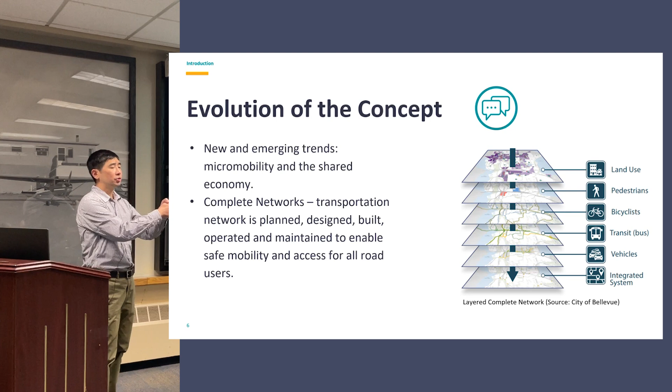So when we think about the network, we want to be thinking about not just the streetscape in its entirety, but all of the different modes that are going to be using that street or that corridor.

And we want to think about the ways that the facilities we build for those modes, and the people in those facilities, are interacting in a way that is going to be safe, comfortable, and encouraging. This is also to say that not every complete street is going to look the same.

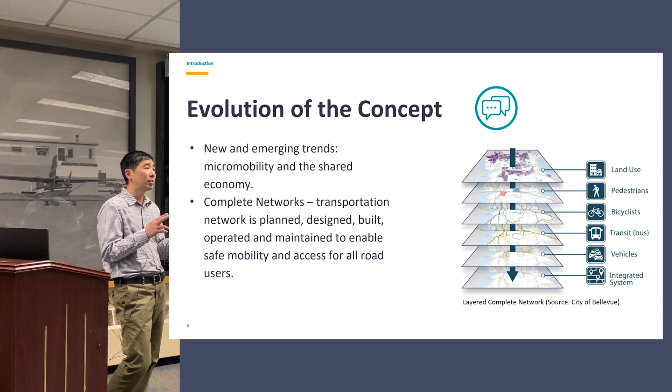When we talk about a multimodal corridor or a multimodal streetscape, it's going to look very different depending on the context, depending on what part of town it's in, and it's going to serve a different mix of modes. Not every street's going to need a bike lane - I think that's an important point we all need to be making. Not every street's going to have a bus stop, not every street's going to have a bus line. So how can we complete the street in a way that serves the broader system? That's, I think, the million dollar question.

How many of you are familiar with a modal hierarchy in concept? Great. So how many of you are beyond concept? How many of you know of a place that has established a modal hierarchy? Yeah, great.

This is a relatively new thing. I would say in the last 10 years, more and more agencies, more and more jurisdictions are starting to adopt this - putting people first. It's less about moving cars and more about moving people. And the way to do that safely, efficiently, comfortably is to prioritize the different modes and where we put our investments, where we put our dollars, where we center our programs. This modal hierarchy is really trying to emphasize that it's our more vulnerable road users - people walking, biking, rolling, taking transit - that we should be lifting up and putting our investments behind. So this is something you're starting to see in a lot of complete street policies and resolutions, in a lot more plans, and as a formalized policy.

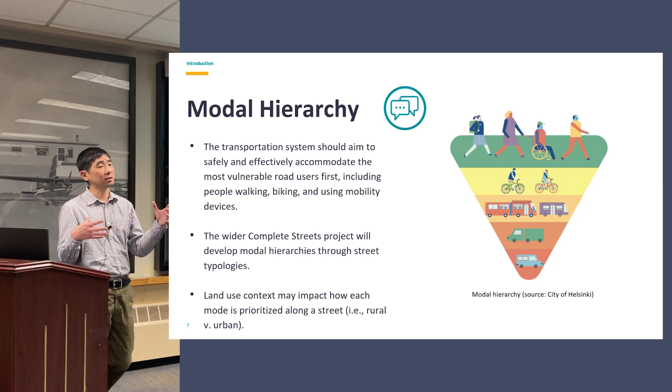Okay, so just wanted to get a little bit of feedback here. Colin's got some examples that I hope you're all familiar with. As we go through these, we want you to be thinking about not only is this a complete street, but who is it serving? Is it what we would consider all ages and abilities? Is it not only safe, but comfortable and encouraging?

So definitely keep that in mind. This is just to get us thinking about, as Derek was mentioning, some local examples of streets that have complete streets components, maybe were designed to be complete streets - kind of what some of the strengths are, maybe where some of the shortcomings are. I'm going to go through the list really quickly, so when we get to the discussion component, if anybody wants me to go back to something, I can easily do that.

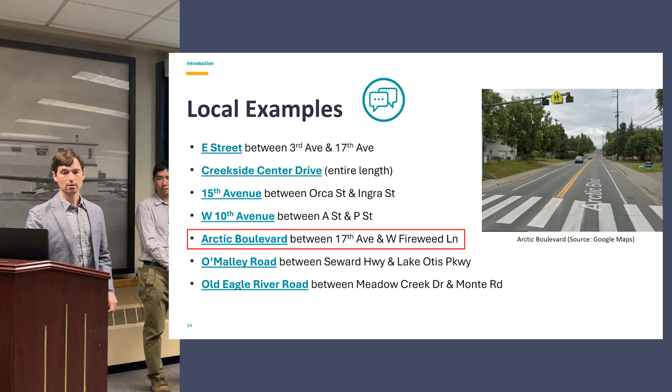So I have a bit of a short list here, but first: E Street downtown between 3rd and 17th Avenue. Creekside Center Drive, the entire length. 15th Avenue between Orca and Ingra Street. West 10th Avenue between A and P Street. Arctic Boulevard between 17th and Fireweed. O'Malley Road between Seward Highway and Lake Otis Parkway. And then Old Eagle River Road between Meadow Creek Drive and Monte Road.

Again, just to open it up - does anybody have thoughts on those streets, where they might be doing things well, where there could be some improvement, where they might be falling short, or any reactions at all to that?

And some things to think about: we have really appropriate and continuous facilities on some of these streets, but are there opportunities to cross where people might need to cross? Are they comfortable with the speed and amount of traffic? Are they adequately maintained in the winter, and is there enough provision for keeping them clear in all seasons? So some things to think about.

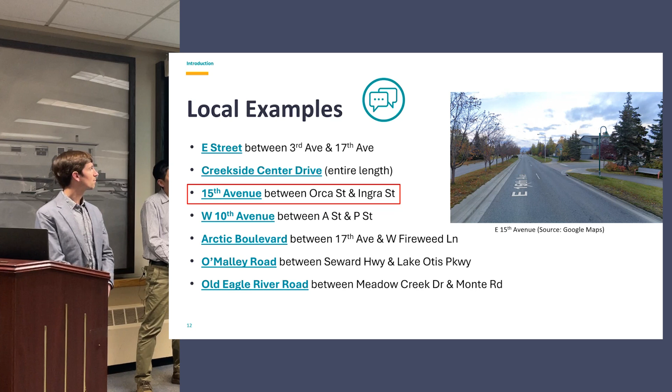But we had a few slides about having network. One of my gut reactions, stripping myself out of context, I know these streets. When I see ones like Creekside Center that have nice landscaping, as you flash through the photos, my gut reaction is, oh, that's a complete street, because it looks more like pictures you'd see in a complete streets plan. Whether or not it actually functions that way, that's my gut reaction. Seeing the trees and stuff makes me think that it is.

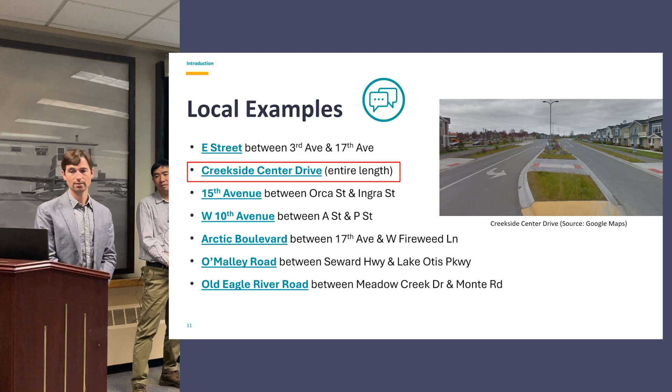Yeah, that's a really good point. Speed is a huge component. Most of these, with the exception of O'Malley, which is clearly a higher speed road, and maybe that's a good transition to talk about that a little bit - this is where we get into context as well. So is O'Malley Road a complete street for its context, or could it be improved? Thinking about 15th Avenue in the Fairview area, those crossings being so difficult is probably not so appropriate for that context. But O'Malley Road, there are a few crossings, but it's also in a much different land use context. So is that appropriate or is it not?

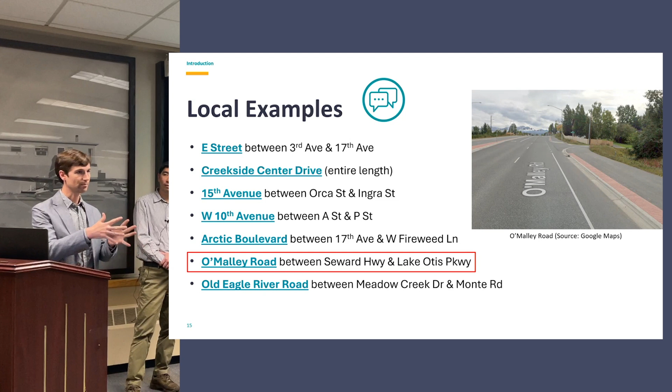And winter maintenance - there is a bike lane, or bike lane/shoulder, an attached side path with no buffer. So in the winter, as we know right now, it gets very, very difficult to traverse. In my perspective, in Anchorage, the street includes a snow storage area - if you don't have a snow storage area in Anchorage, you don't have a street. But then an attached bike path like that, given the speeds and volumes, it's not the right facility for biking on, based on the guidance that exists. So a separated multi-use path would be a much more appropriate facility versus a multi-use path that isn't separated.

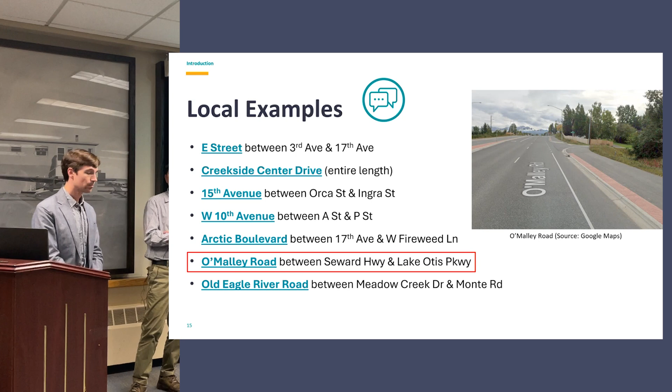Yep, and that's a really good point too - just because there's a bike lane doesn't mean it's the right spot for it. That's another contextual element. With those speeds and volumes, most people are not going to want to bike in the street at that location. So I think it's easy to look at a lot of these example photos and start to pick them apart, start to think about where is the room for improvement. I think we could argue there's room for improvement on all of them, right?

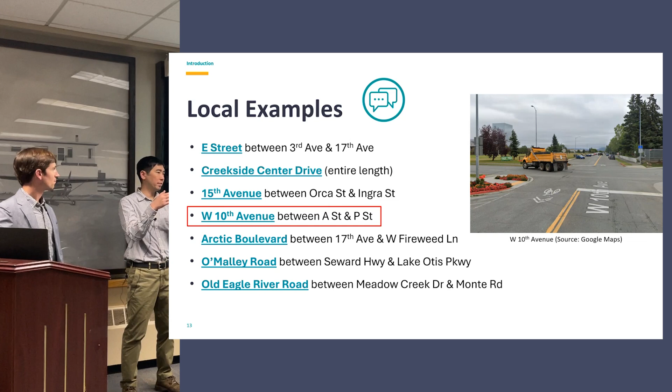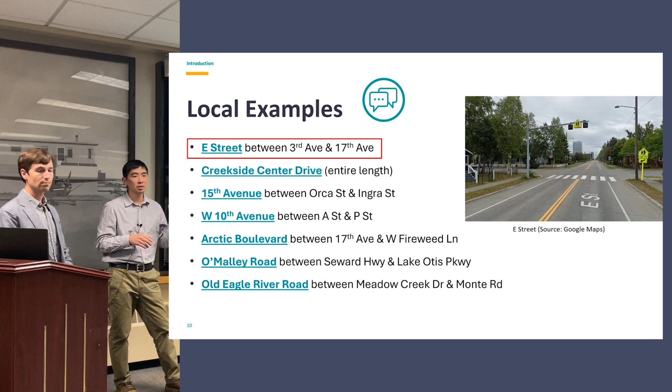But that's one of the beautiful things about this modal hierarchy - it gives us a framework for evaluating roadways based on the user type. So talking about the pedestrian experience, when snow is being stored in a buffer, if there's a buffer, and thinking about it from the perspective of different users helps us identify what are the areas for improvement with each of these streets to make them more complete. Exactly, and thinking about age ranges too - all ages and abilities - some crossings might be fine for us as adults, but for a smaller child, they might be kind of a deal breaker.

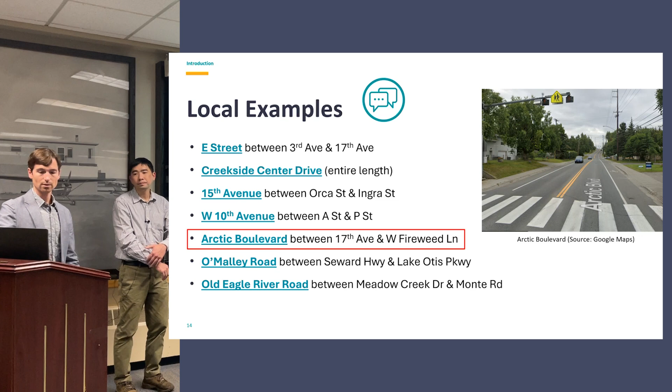Any other thoughts before we keep going? I don't know the history of it, but I'm glad you included the Creekside Center Drive example. I think that was done entirely by private development.

I think it's important to put in here because that's not department or agency folks dreaming that up. That's a representation of what was in code or in standards to require a developer to build that. And that's why it looks the way it does for that stretch, and functions the way it functions, and then it ends, and then what?

Good point. Creekside Center Drive as well. It's nice, lower volume, cars are going a little slower. And they've been putting higher density housing there. It's like they built it and then it got more dense. So that's been really cool.

And there is a way to get there, like if I wanted to walk from my neighborhood, I could get there and get to the Fred Meyer. But the wayfinding is horrible. It's like, go down this dead end street to get to the path. So talking about that connection to make it a network, it needs a little wayfinding.

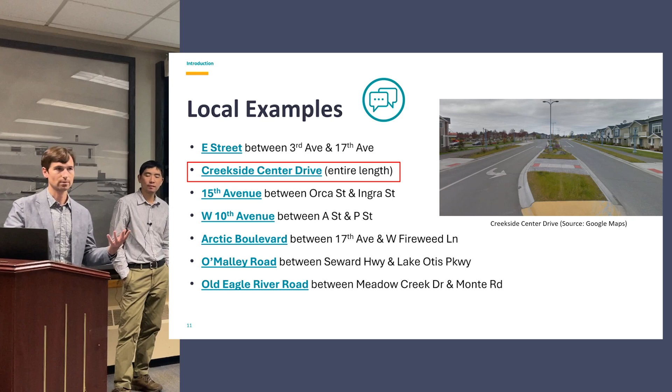And switching gears a little bit, going to a policy basis for what we're doing here. So just the quote that we like, which explains complete streets policies and what they're about broadly. I'll read it: A complete streets policy ensures that the entire right of way is routinely designed and operated to enable safe access for all users. Pedestrians, bicyclists, motorists, and transit riders of all ages and abilities must be able to safely move along and across a complete street.

So it's a good quote because it brings a variety of things into the mix. It talks about maintenance, talks about routinely—here that could mean all seasons, not just summer, not just winter. It talks about different modes and different ages and abilities. And it also brings up the fact that people need to cross the street. It's not enough just to have a street where you can move along—you have to get to destinations on either side.

Digging into it a little bit, what does a complete streets policy do? This is going to be review for a lot of you because we have a complete streets policy. AMATS has a policy and it does many of these things, if not most of them. I won't read through them all, but establishing commitment and vision is really important: applying to all projects and phases, coordination, adopting excellent design guidance. The policy does reference multiple design guides and the potential to bring those into complete streets design.

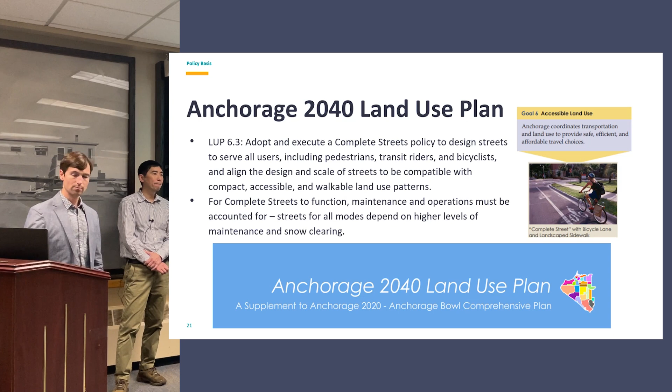Okay, so we're going to talk a little bit about design here. Again, we're going to touch on this idea about context, how it relates to context-sensitive solutions, and how we are accounting for context - land use context, transportation context, the streetscape context - from the perspective of different users throughout, especially in this design chapter.

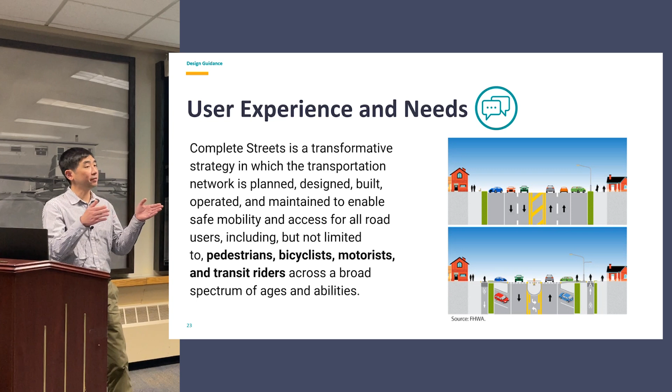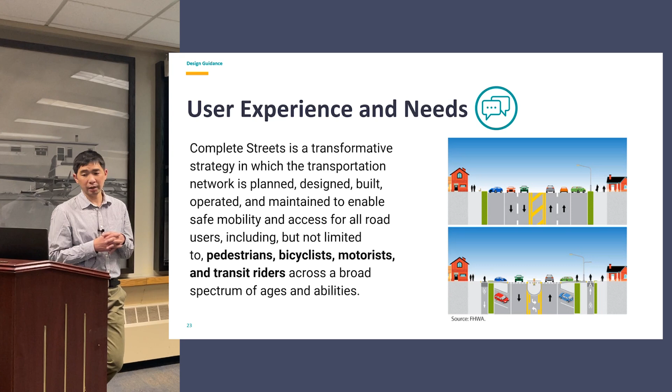So when we talk about all ages and abilities, we talk about satisfying the needs of all of the different modes. Complete Streets is really supposed to be an all-inclusive policy, plan, and implementation. It should inform the decisions that are made along the way to decide how we select a facility, how that fits into our existing street design classifications, our functional classifications, so that it's a true reflection of the needs, and in most cases, the competition of space that we're going to encounter when we try to reallocate them to accommodate different modes.

So, all ages and abilities - some people call them AAA streets or AAA networks. This is trying to ensure that the facilities that we're providing are safe and they're comfortable. They're of course accessible, but that they're going to be used - they're intended for use for the widest demographic of users. That includes people with disabilities, young kids, older adults, the full spectrum of users. So how do we equate that to the types of facilities that we're designing, the types of facilities that we want to provide in different contexts?

Well, so we have a couple of different methods. Who's familiar with level of traffic stress, LTS? Maybe about half of you. So this is an evaluation and analysis that kind of cropped up maybe about 10, 15 years ago. And it allows us to assign a score to a streetscape context based on user comfort, and that's a translation of users' perception of safety - what we think different users are going to feel and experience along that streetscape in that particular facility. So it's a scale of 1 to 4, 1 being the best and 4 being the most stressful or the least comfortable.

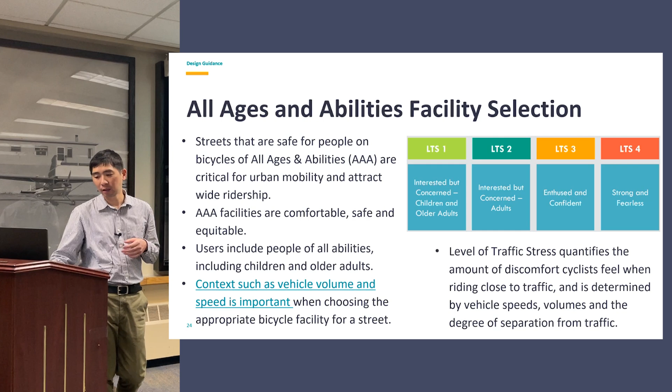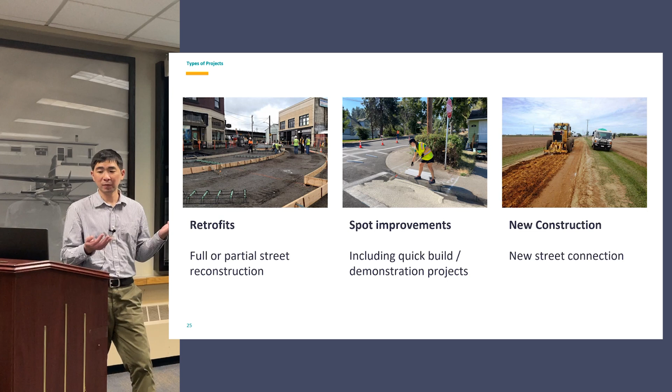LTS is, I'll just say, a starting point. It allows us to identify where to start. So this is part of the implementation that Colin's talking about. And we can apply this to a variety of different kinds of projects, from new construction to street retrofits to spot improvements - improving things like curb ramps or corner curb extensions, bulb-outs, that sort of thing. We can apply this for long-term projects, we can apply this for short-term demonstration or pilot projects. And we can do this in a variety of ways that's going to tell us how well it's working, how well the users are responding to the level of stress or the level of comfort that they're experiencing in those facilities.

So as designers, planners, we need to understand the application of things like facility selection guidance, of design guidance, but we don't have to know all of the details. We don't have to know the nuts and bolts - that's the job of engineers, civil engineers. That's the job of traffic engineers, to understand the details in the design. Fortunately, we have a lot of great resources at our fingertips, especially when it comes to active transportation over the last 10 years or so.

There's a long list here of things that have just been updated or are about to be updated. Things like the National Association of City Transportation Officials, NACTO, Urban Bikeway Design Guide. The new AASHTO Bike Guide is going to be coming out in mid-December. And of course, PROWAG, the Public Rights of Way Accessibility Guidelines, was just codified.

So we have this guidance. We have this really great guidance at every level, federal, state, local, and it gives us a really good idea of how to meet the needs of a particular facility, of a particular streetscape, based on all of these different metrics. And so all of that's available at our fingertips. It's the application of that, the implementation of that we want to talk about today.

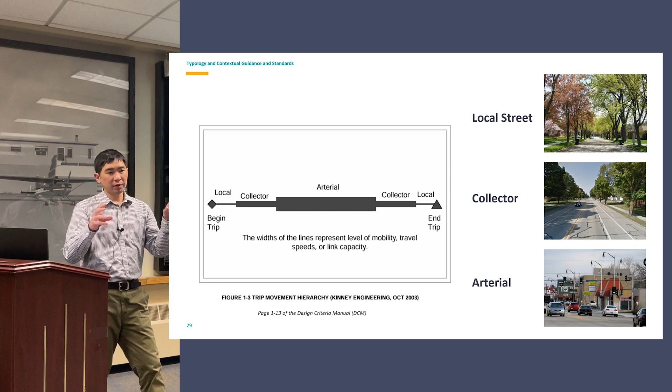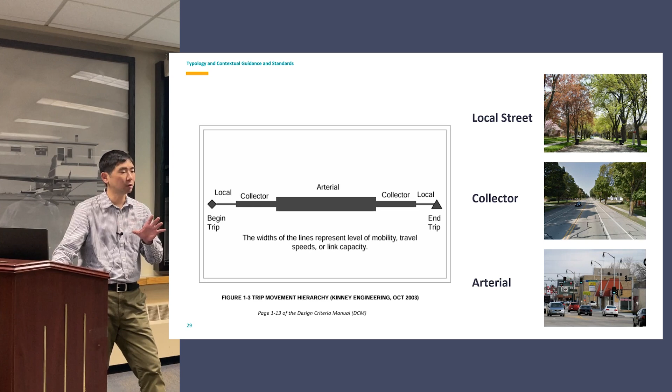But we can broaden that framework to think about the other modes using other criteria. We can still use this arterial, collector, local streets hierarchy, that framework, to define a context that is suitable for pedestrians or for cyclists or for people taking the bus. We can do it for freight too. And so this hierarchy still applies, we just want to broaden our thinking and application of it.

So I think the next few slides here are just some quick screenshots of our design standards, design classifications for the arterials, collectors, and local streets. You can see these are pretty typical dimensions, pretty standard layout for each of these cross sections. Arterials, we've got trails, we've got sidewalks, generally 11 to 12-foot travel lanes, and we've got some nice medians in there.

The cool thing that you don't see in every cross section standard drawing in other places is that buffer for snow storage, which is nice to see. It has a lot of benefits beyond snow storage.

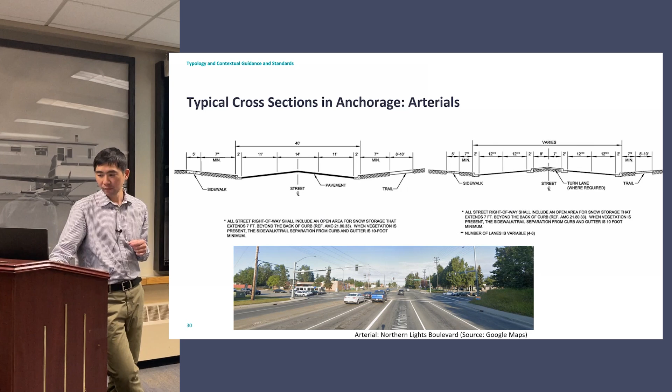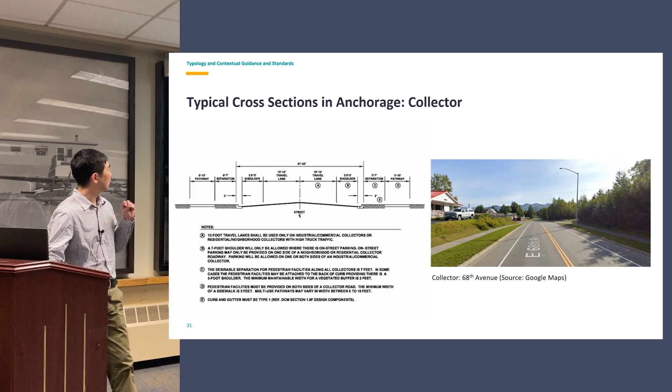Same thing with the collector. You can look at the sidewalk widths, those are always going to vary. Those are typically the more constrained kind of element of that streetscape. Sidewalks and pathways, the amount of separation we provide back of curb, and then the travel way itself from curb to curb. What are the lane widths? What are we looking at when it comes to turn lanes, turn pockets, center turn lanes, and shoulders? Those are typically the places where we're looking first to see what flexibility we have, to see what room we have to work with, to start to enhance the quality and the design of the facilities that are serving other modes.

And there's one for the local street as well.

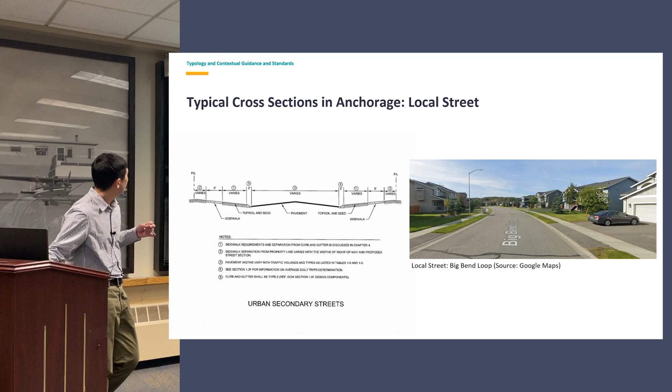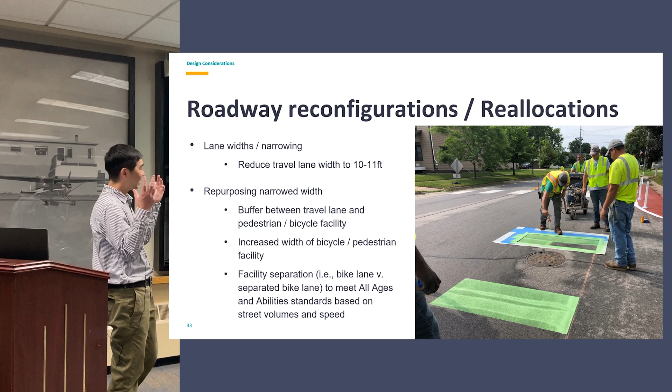So who's heard of the term road diet? We've all heard the term road diet, right? It can be somewhat controversial. It's sort of limiting in that it implies a more limited scope because we're taking something away, we're putting something on a diet. And so in terms of terminology, we've kind of moved away from road diet to roadway reconfigurations, the reallocations. It's all the same concept.

First, we're looking at the number of lanes. We're looking at opportunities to reallocate some of that space for other uses. We're looking at potentially narrowing some of those lanes. Wider lanes encourage faster speeds, so how can we right size them so that A, they have that traffic calming effect, and B, we can use that space for something else? Every 6 inches matters when it comes to reallocating that space.

Typically, when we're looking at a complete streets project, we're thinking about the pedestrian experience, we're thinking about transit. But I think where everyone kind of gravitates towards is, are we adding a bike lane? And what does that mean? If we're adding a bikeway of some kind, how is that space going to serve that facility? More importantly, how is it going to serve the quality of the experience in that bike lane? We can gain 4 feet somewhere and stripe a bike lane, but what's the point of that if no one's going to use it because it's on a 40-mile-an-hour arterial?

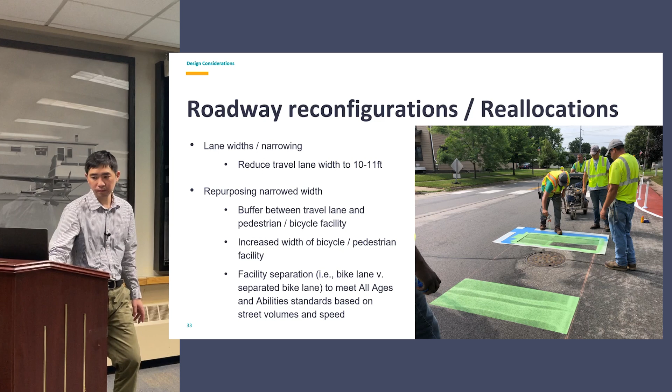Typically, you find these on lower order streets, so your local streets, sometimes on collectors. They're ideal in application when it comes to bikeways and creating a more multimodal corridor. In Portland, we call them neighborhood greenways. In other places, they call them boulevards. There are a handful of other names for these local streets, but the idea is that they're slow streets that prioritize pedestrian movement, local traffic, kids riding bikes, people walking dogs, because we want those lower speeds and more comfortable environments.

Generally speaking, when we're talking about traffic calming and completing a street or completing a network, when we're introducing diverters, it's to allow the permeability for pedestrians and cyclists while limiting the permeability or access for people driving.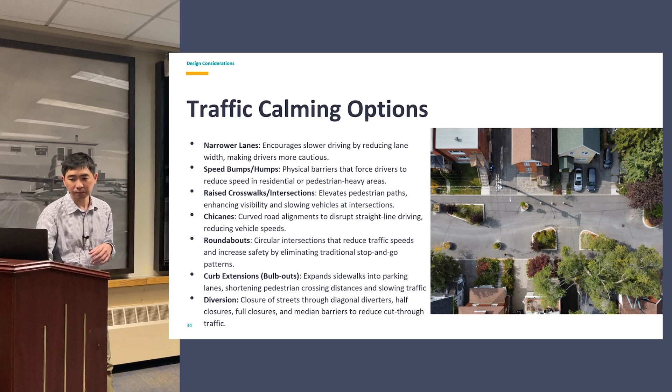Okay, so I'm going to go through some pedestrian facilities and some bike facilities. I really want to focus on the things you're most interested in that maybe you don't see as much of around town. I know you've got great sidewalks. I know you've got less than great sidewalks, paths, side paths, shared use paths.

But I also want to talk about things like enhanced crossings, not only marked crossings, but enhancements like rectangular rapid flashing beacons or HAWK beacons. You can introduce medians or curb extensions, and you can do those in a way that doesn't constrain things like stormwater drainage. You can do them in ways that allow for more buffer space for snow storage.

And then, who here is familiar with protected intersections? The concept of protected—okay, great. Usually you see that in the cycling environment, where you've got a separated bike lane or protected bike lane. What happens at the intersection? You want to design it in a way that reduces conflicts and makes for a more comfortable environment, and that's going to impact all the different modes.

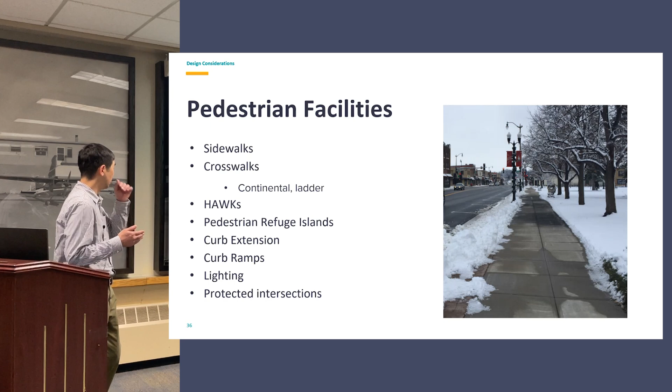All of these things require space. And unless we're building a brand new subdivision, we've got to figure out how we want to prioritize the space that we have toward things like this.

Okay, so bikeways. My understanding is that we don't have a ton of separated bike lanes in town. We maybe piloted one downtown. Yeah, okay.

This is a relatively new thing in the States. We started to see these maybe about 15 years ago, in more rapid implementation. City of Davis in California had been doing them in the 70s, so there are traces of this in the States, but it's been a fairly recent development in most urban contexts.

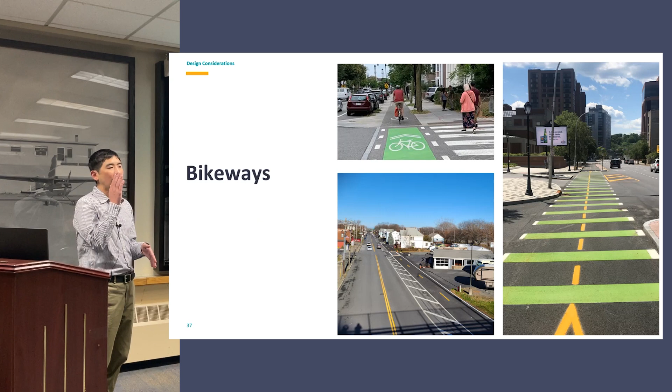Protected bike lanes, separated bike lanes - these are bikeways that have not only a buffer, a physical separation between other modes, but some kind of vertical element, a barrier of some kind. These range in their degree of protection, but something to physically separate different users. So that's a couple examples of some separated bike lanes.

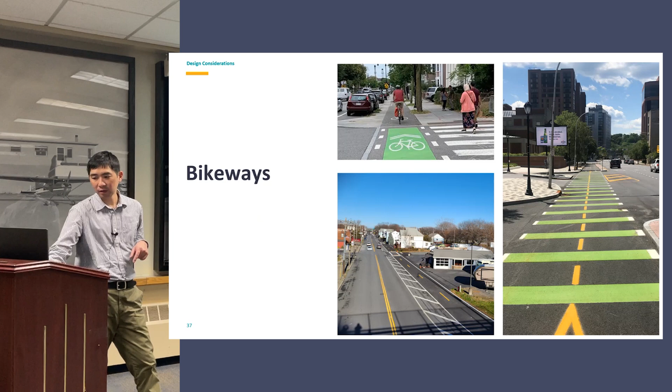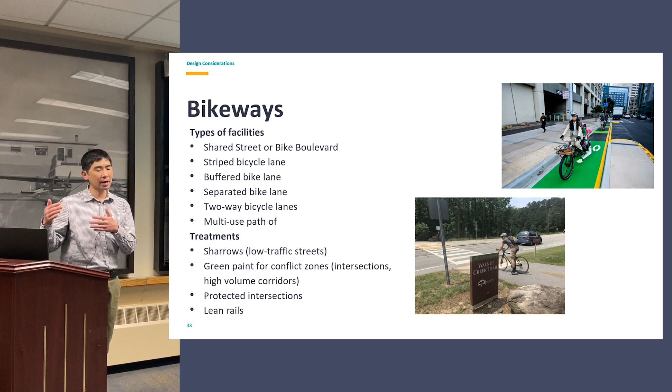Generally, the practice has moved toward physical separation as the higher and better facility type, right? The more separation you can have, the less likely there's going to be conflicts. I think there's a lot of truth to that, but it has to be done in the right way. There's a lot of design details here that could quickly make these types of situations more dangerous, more uncomfortable. So you have to be really thoughtful about how we're doing them. Simply laying down a two-way protected bike lane in an urban context can come with a lot of challenges.

Same thing is true of shared use paths. When we're mixing users, when we're introducing different users operating at different speeds, going in different directions, in constrained environments, things can get pretty tricky pretty quickly. So we want to be really thoughtful about how we're not only designing these facilities, but designing the networks and the corridors that are going to allow for really great, safe, comfortable transitions.

Okay, so this is kind of the list of bikeway types that you might see. I was just going to add to that.

I think in Anchorage, the challenge that we have, particularly with physical separation, is the difficulty in maintaining it in the winter. Yes - if it's part of the road and it can be plowed as part of the road and doesn't become the snow storage, then that makes it a lot easier to maintain. But that reliability in the winter is a big challenge. Absolutely, and I'll touch on maintenance here in a second, because I know that is really important, especially in the more northern climates where we have snow events, where it's on the ground for longer periods of time. And you're right, that is usually the biggest challenge for cities implementing protected bike lanes of any kind when we've got snow.

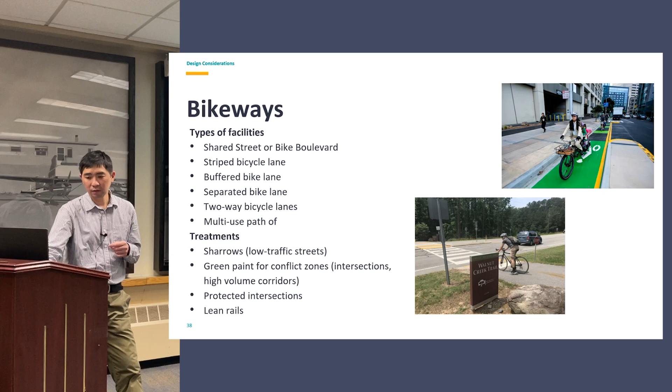Same thing's true of transit. Not only the transit operations and how well the transit system's functioning, but all of the different elements that contribute to a good transit experience - the bus stop designs, the stop amenities, what it's like waiting for the bus. In addition to all of the service improvements we can make to the operations of the transit line itself, the transit vehicle itself - dedicated bus lanes or BAT lanes, things like transit signal priority that give extra green time for transit vehicles, queue jumps. And then again, thinking about the user experience: what it means for someone to walk out their door, walk to a bus stop, wait, get on a bus, and then do the same thing on the opposite end. Thinking about locations, thinking about frequencies is all really, really important.

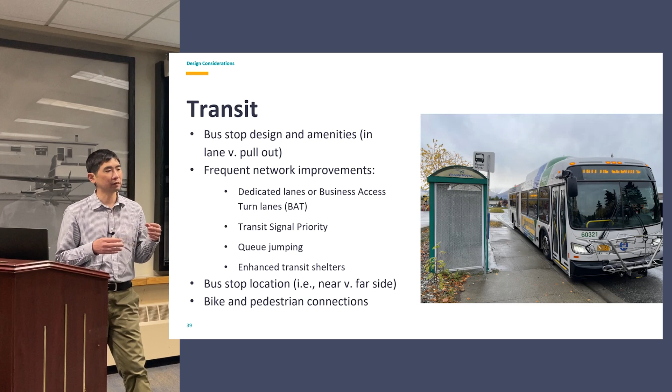More recently, we've come across the need to understand the interactions between bus riders and cyclists as we see more of these separated bike lanes being built. What does that mean when they're along a transit line and you've got a bus stop or shelter? How do you manage those interactions in a way that reduces conflicts for people cycling, people stepping off the bus, and pedestrians running to catch the bus?

As Colin was pointing out earlier, thinking about not only the facilities along the corridor, but how we cross the corridor, and really providing opportunities for people to do that safely and comfortably. So thinking about the distance between crossings.

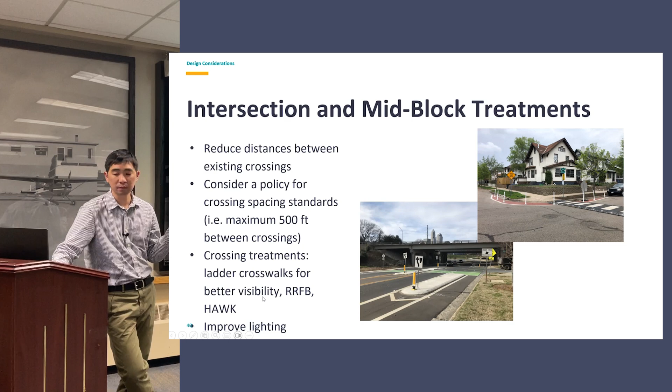This is an example from Portland of the crossing spacing standard. Depending on the context, we have what we call pedestrian districts, which are part of the pedestrian modal network. You have to have a crossing every 530 feet, no more — you can have more of them, but at least one every 530 feet, because that's essentially the length of two blocks.

Further from the core, in areas that are not pedestrian districts, not adjacent to transit, parks or schools, that spacing can be a little further out. You can space them at slightly greater intervals because there's not as much activity, and the destinations are fewer and further between. So this is an idea of a policy that establishes actual design and how you're planning for that kind of activity across the network.

How are we doing on time? 4:03. Okay, we're probably going to want to jump through here, but go ahead.

Is that Oregon rule of thumb or guidance, or is it documented somewhere? It's documented — that's from a table in their Blueprint for Urban Design, which is their design guidance for a variety of different highway facility contexts. It's a really good document from a policy standpoint.

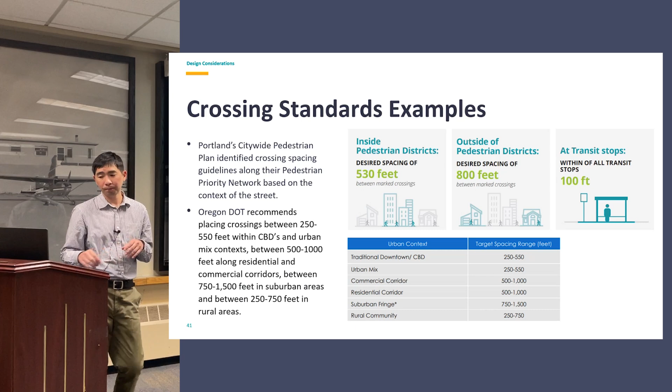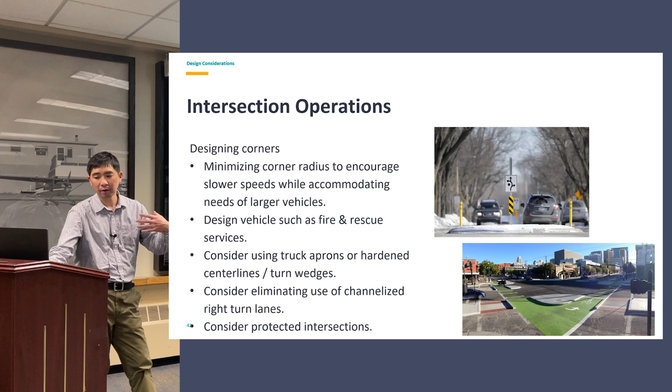We talked a little about intersection operations, designing the corners for the different types of activity we anticipate — not only crossings, but turning movements, interactions with bikes, bus stops. These are all the little design details that will either contribute to the safe and comfortable environments we want to see, or diminish them. So these are some examples of different treatments at the corner we might consider, in addition to the protected intersections I mentioned earlier.

That's all the geometric design treatments we think about. There's also signal timing and operational improvements we can make to buy folks more time and separation — things like leading pedestrian intervals, leading bike intervals, bike signals, turn restrictions, resting in red, transit signal priority. These are all ways we can optimize signal timing and the movement and flow of traffic to prioritize these other modes.

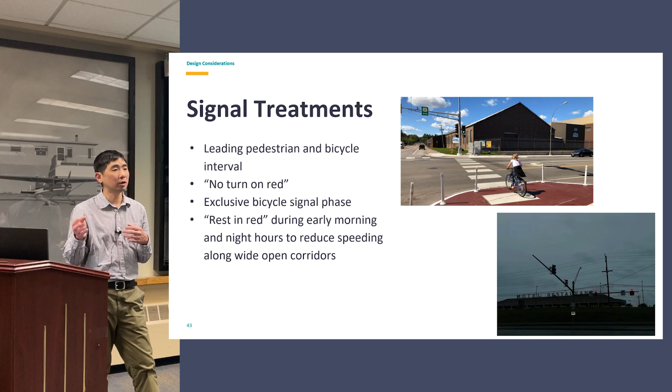Thinking about that experience from the beginning of a trip to the end of a trip — what do people need at their destination? What's going to encourage them to make the trip in the first place? How can we make it easier, not more burdensome, for folks arriving by bike or transit? Providing bike parking is an easy one, but there are lots of ways to get that wrong and reasons why people don't use it. Park and rides are another traditional means of providing capacity for people arriving by a certain mode.

Mobility hubs — who's heard of a mobility hub? I think this is pretty common terminology these days, but it's the convergence of all those different modes. Increasingly, it's not just about transportation needs and end-of-trip facilities for folks arriving by different modes, but the kinds of development potential we might have as part of that — thinking about community centers, resiliency hubs, and places people naturally gravitate to, providing all the services they're going to need.

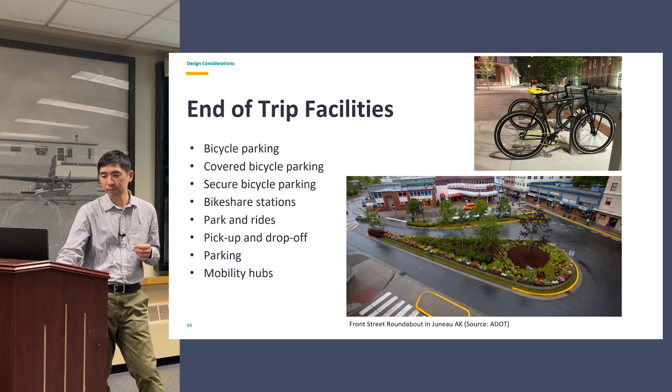Okay, last slide: maintenance. This is general maintenance, but also winter maintenance. Having a complete streets policy, a good one, is going to involve policies around maintenance, including prioritizing maintenance for the different kinds of facilities that we see.

Not just how often and when and what roads we're plowing in the winter, but what about the bikeways? What about the sidewalks? What about the paths? What about the bus stops? Thinking about it more holistically from a complete streets and complete system perspective.

We want to know that policy is going to provide for the adequate maintenance of those facilities, but also think about those rare storm occasions where snow's on the ground and you've got piles of it. How frequently do we need to be maintaining that? And what are the ways that we can equip our public works staff to deal with it in a way that is cost effective?

Budgeting for maintenance, big deal, right? We can incorporate that into our policies so that we're not just thinking about the capital costs of something and finding out year after year, snowstorm after snowstorm, that our fleets are inadequate, that we don't have the right tools for the right jobs.

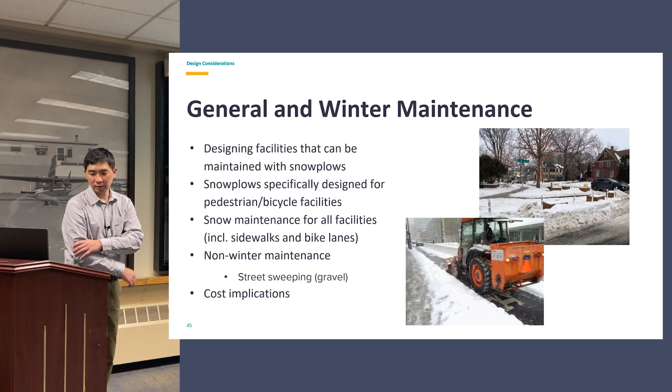As you walked in, you walked past the table with all of those little game pieces. We're going to ask you to turn to your neighbors, get into groups of about five or so, and then we'll distribute some materials. Basically, this is a streetscape design exercise. We're going to ask you to design a streetscape based on a road that should be somewhat familiar, or a context that should be somewhat familiar. We want to see what y'all come up with. The goal, of course, is to make it as multimodal as possible.

As you're getting started, we're going to come around and assign some roles. We're going to ask you to put on a different cap, and we want you to advocate for the kinds of things you think would be needed from that perspective. At the end, we'll reserve a little bit of time for you to come back and compare what y'all came up with. So yeah, maybe start assembling into groups of about five or so.